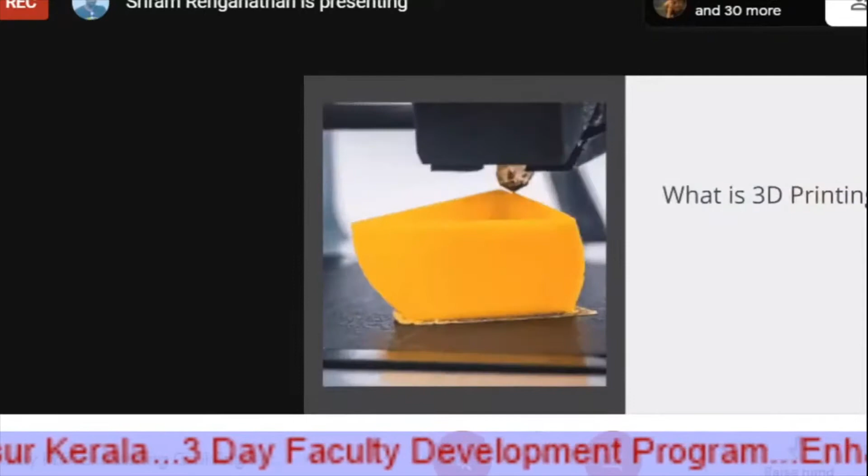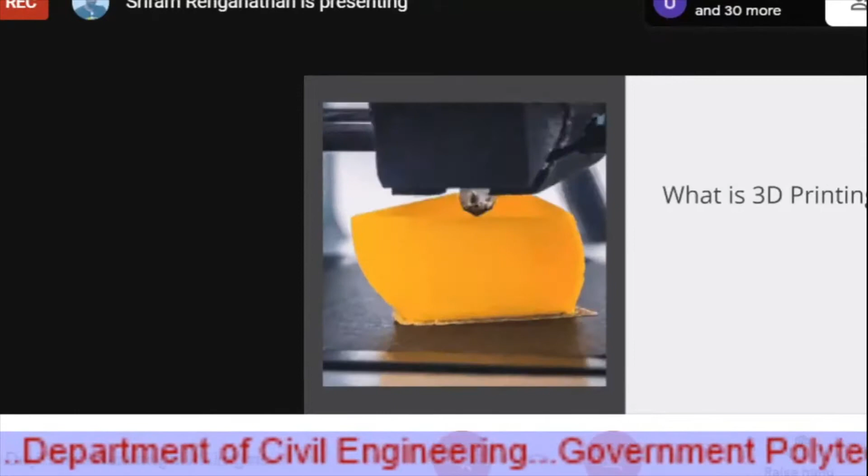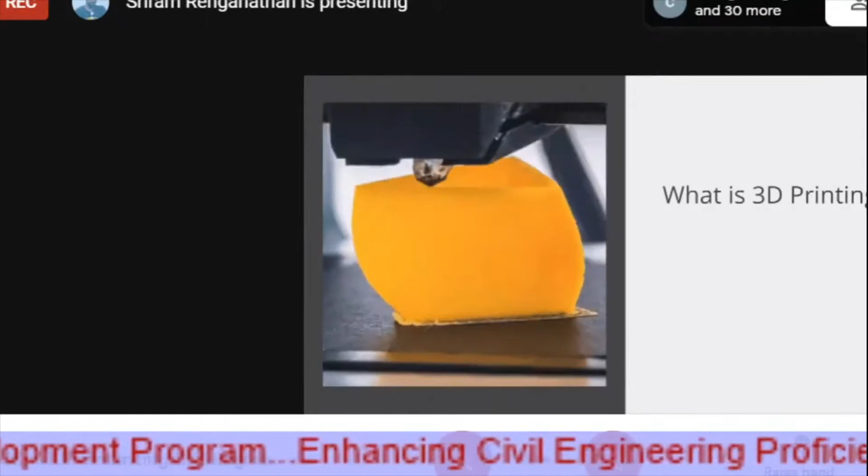As you know, 3D printing has been a much hyped technology in the past 15 to 20 years. It initially started out as a prototyping technology wherein you can make prototypes using 3D printing in plastics - you call it FDM machines. But nowadays the technology has pushed forward, and there are 7 different 3D printing technologies. When we say 3D printing, it's not just a single technology - that is a slight misunderstanding. There are different technologies in 3D printing, while FDM is one of them.

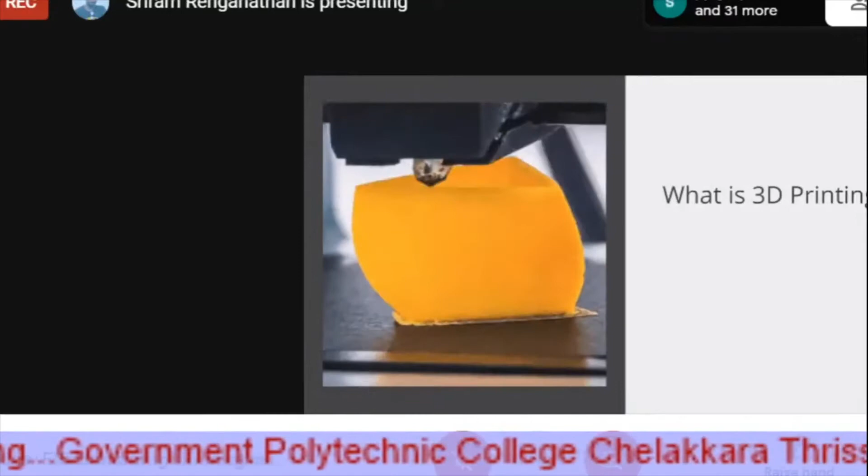3D printing is nothing but layer by layer deposition of material in order to produce a physical object. Once you give the CAD file, the slicer converts the CAD file to G codes, and the G codes translate the machine movements. Once the material is given, it starts manufacturing the object. That is how 3D printing works.

A critical aspect of any 3D printing technology is first the machine - you need to have the machine in place. Relating this to concrete 3D printing, there are two types of machines: one is gantry based and another is robotic arm based. Robotic arm has 7 to 8 axes of rotation or movement, whereas the gantry has 3 axes - X, Y, and Z.

Tvasta has built a gantry system which can be used to 3D print concrete. Even in the gantry there are two modes: one is offsite 3D printer, and second is onsite 3D printer. An offsite 3D printer means you have the machine in the factory, you 3D print the modules there, ship them to the site, and assemble it on site. This is one model. The second is an on-site 3D printer, where you take the machine and transport it itself to the site, and then 3D print the building there.

Tvasta's first 3D printed house was built using off-site 3D printing, but we are also working on an on-site 3D printing machine currently. That is one thing. And material - if you look at it normally, the traditional construction method has been done by brick and then having mortar around it and then building using it.

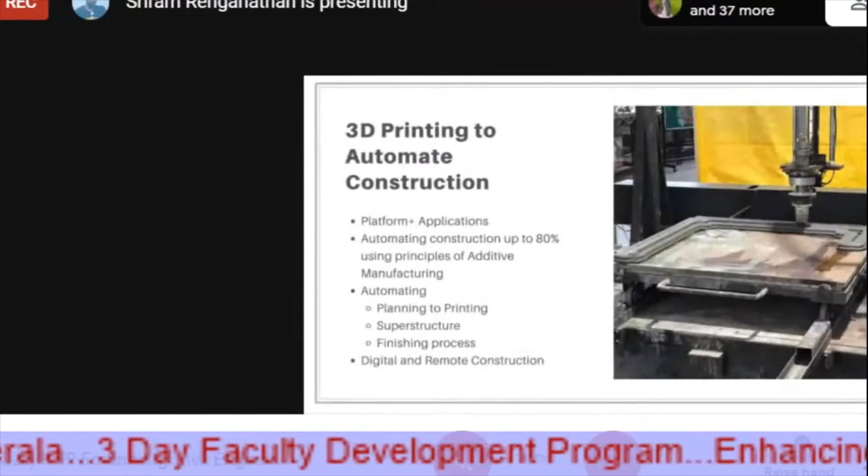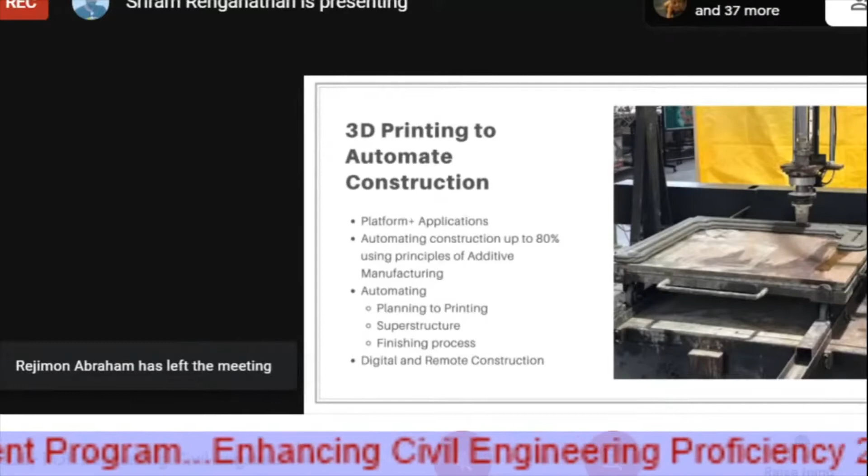What is our idea with respect to building this technology? We want to automate the construction process. Mostly, the construction process takes 6 to 8 months of time, mainly because of labor dependency - we need to equip our labor from unskilled to semi-skilled. We have a lot of quality issues because we need a lot of skilled labor, and it takes a lot of time. So we have a lot of labor dependency here.

You could have seen in this COVID situation, laborers from different parts of the country are required to carry out construction, and in their absence, the complete projects stall - it will not move. So our idea is that we need to automate the process, which will reduce labor dependency. Importantly, we are not eliminating the labor, we are just making them go from unskilled to semi-skilled. For instance, in an area where 200 laborers are required, we reduce it to around 20, and they work efficiently such that in the time of one 6 to 8 month project, they can work on 5 to 6 projects.

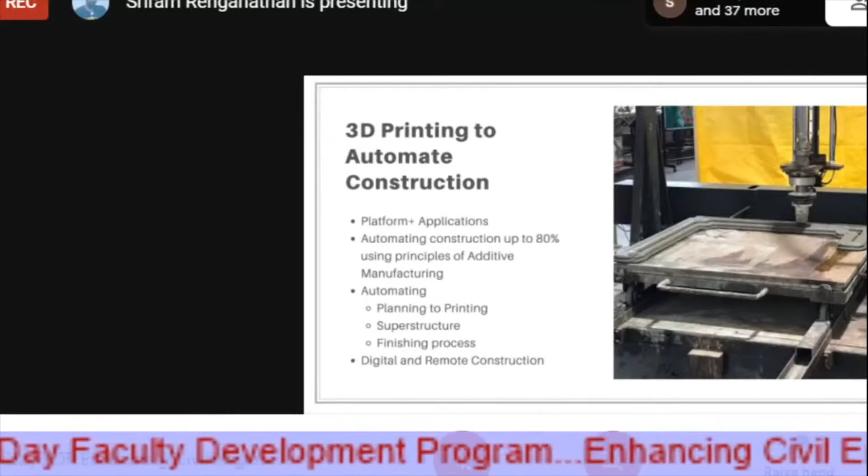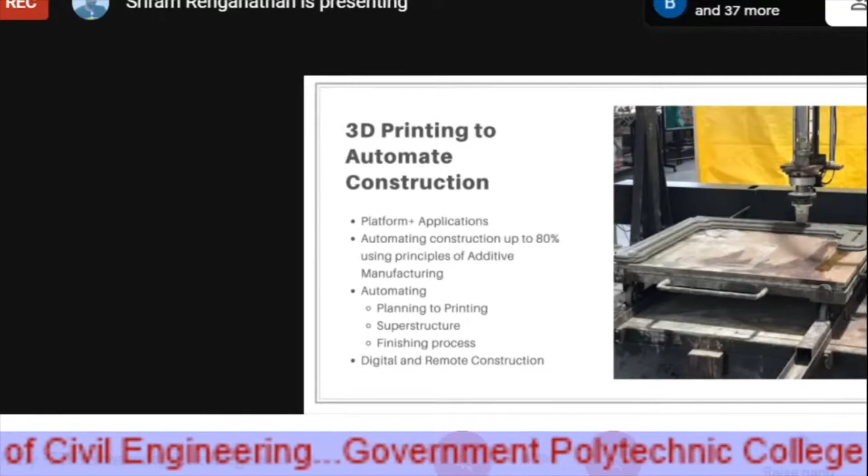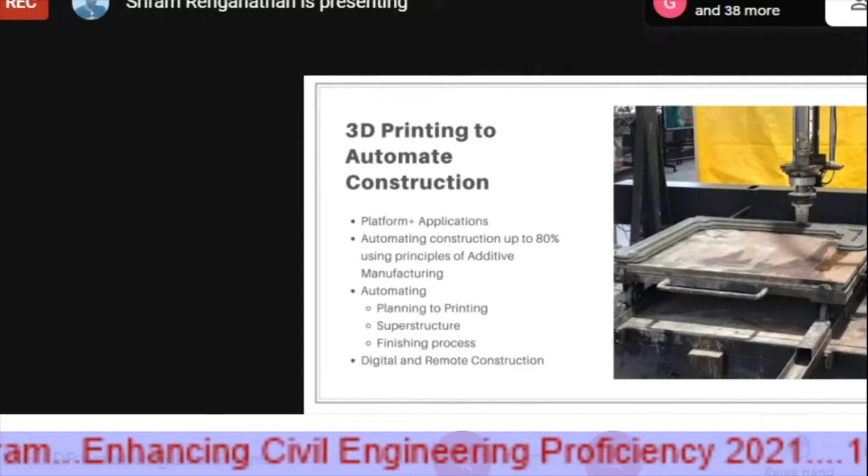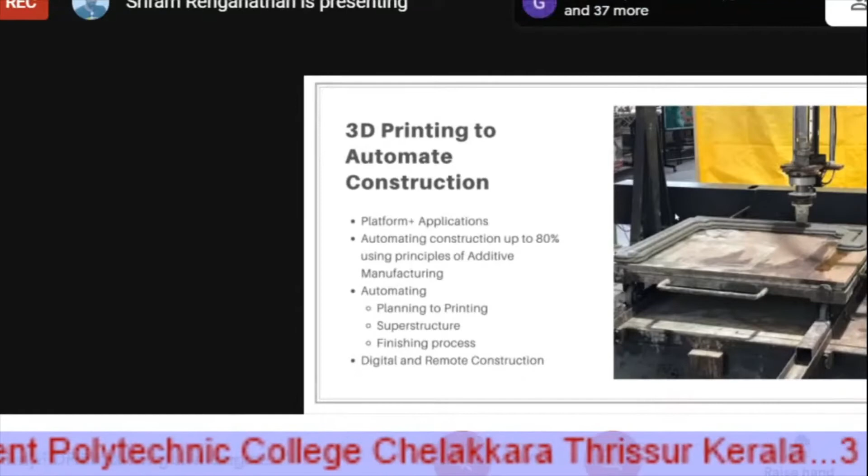Literally, our house took 3 weeks to 3D print and assemble. Look at that time limit - you can get your houses in less than 3 weeks. In a way, we push the productivity - we can build more houses in a particular time, and that is what our technology is about. We want customers to buy their houses in the same way they've been purchasing cars and bikes - you book it, give an advance, and in a matter of 1 month you get your car. We want house purchase also to be done in such a way. That is the main aim behind building this technology.

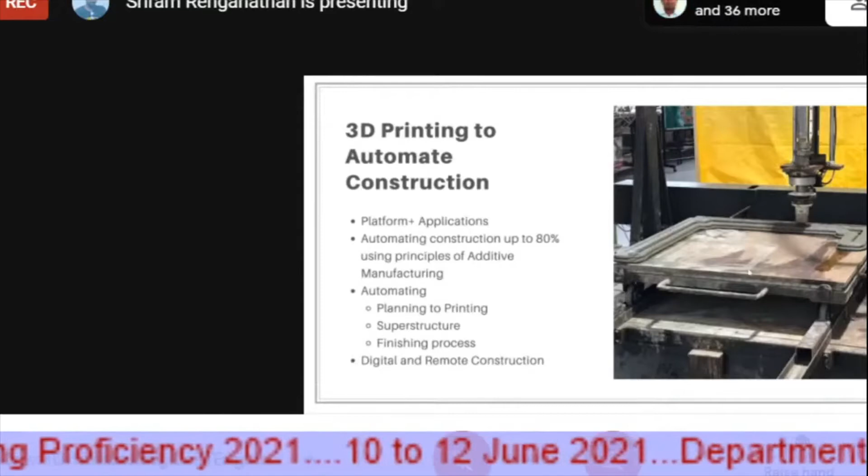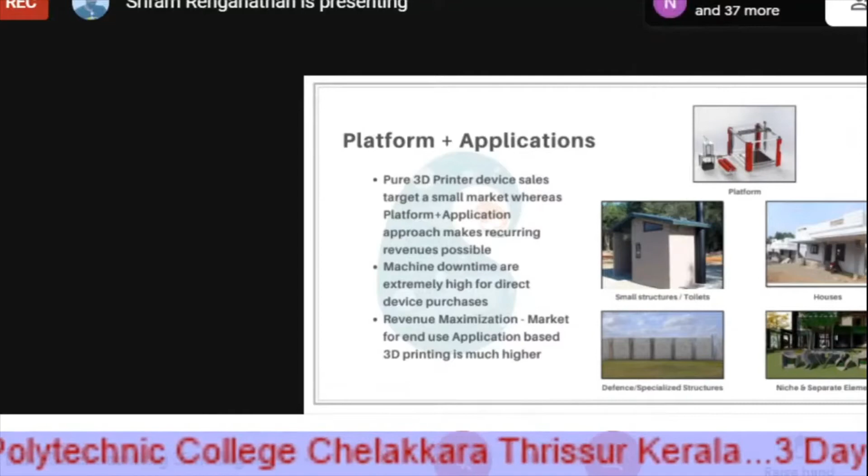So different applications of it. One is toilets, like Swachh Bharat Abhiyan. It requires a lot of toilets and emphasizes the hygiene of the environment. So it can be easily made using 3D printing. The advantage of 3D printing is that you can customize it accordingly. Generally a matchbox or straight structure is done; instead we can go for curved walls. We can explore more designs that can be done.

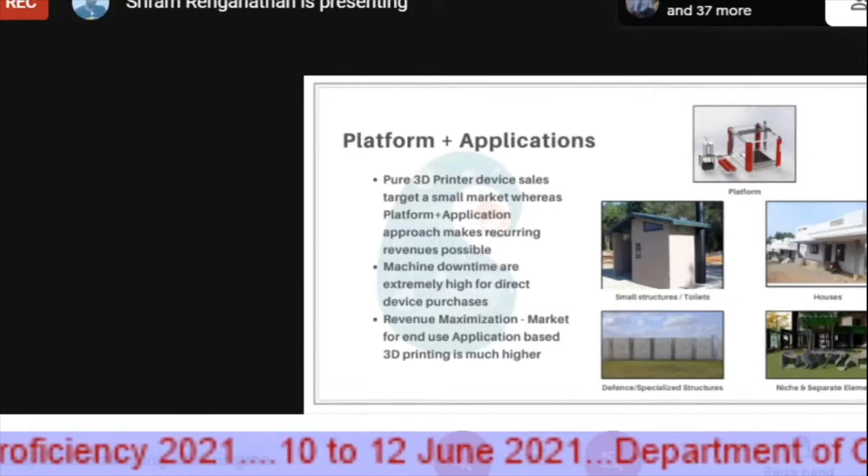And then houses, of course we are targeting affordable houses for all in the long term. We are working with the Ministry of Housing and Urban Affairs. We are also looking at different segments of housing: premium segment, affordable segment, and then infrastructure projects, several things, and then niche and separate elements.

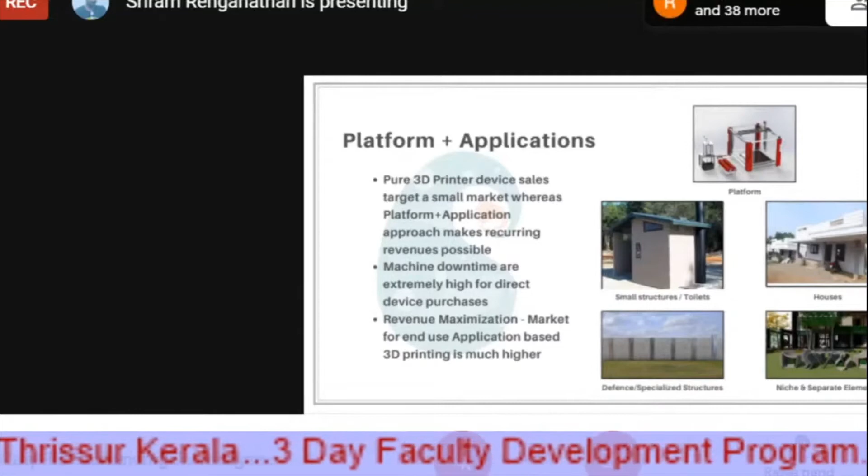We are also offering 3D printed concrete chairs, 3D printed concrete furniture, and architectural elements. So using this technology we are working with different applications.

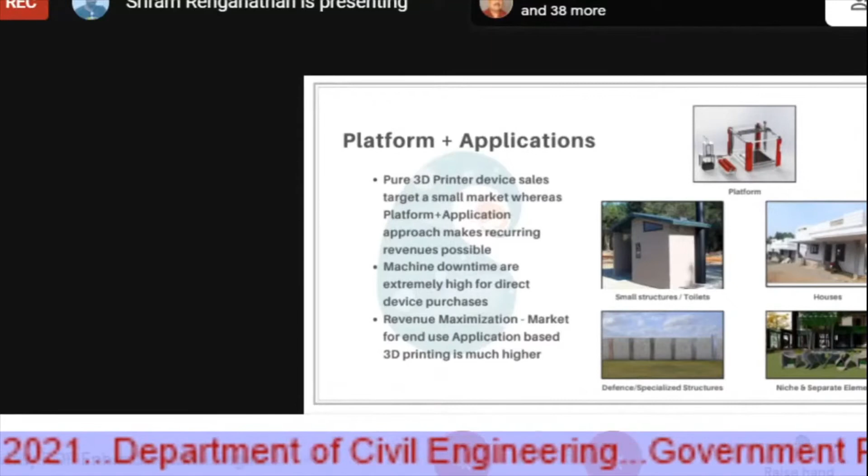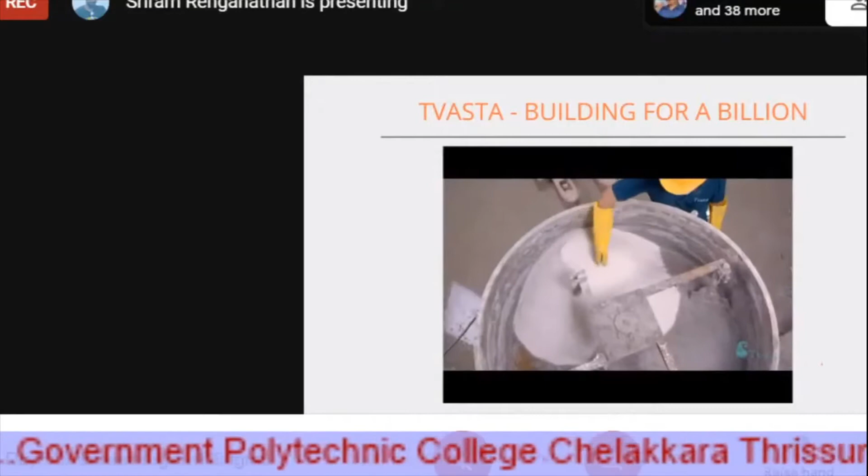So this is how the entire house was made. You first prepare the mix and then pump it to the 3D printer, and then start printing layer by layer. The software controls the entire process.

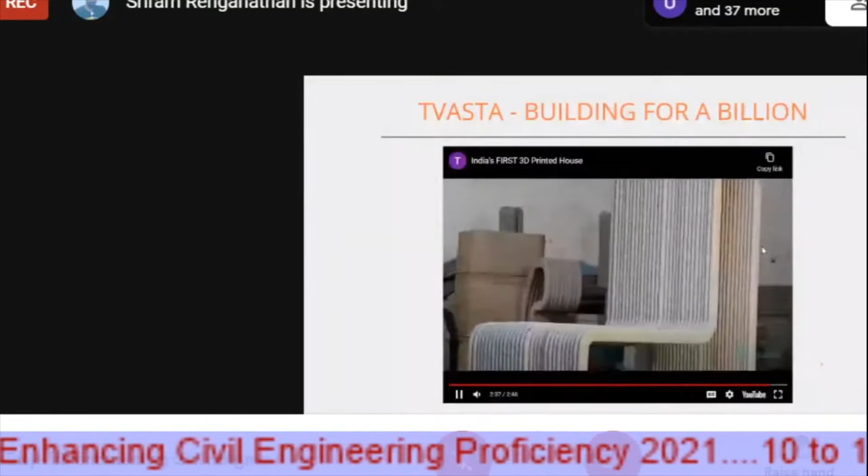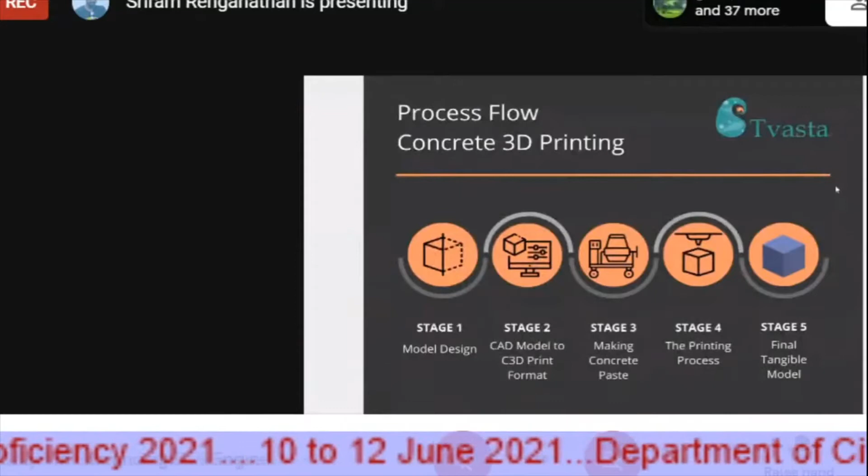I will explain the different stages in concrete printing. First is the model design, and once you design it, you input it to the software, which will slice it into G-codes. Parallelly you make the concrete mix, and once the mix is prepared, it is pumped into the 3D printer, and finally the model is printed. That is the process flow.

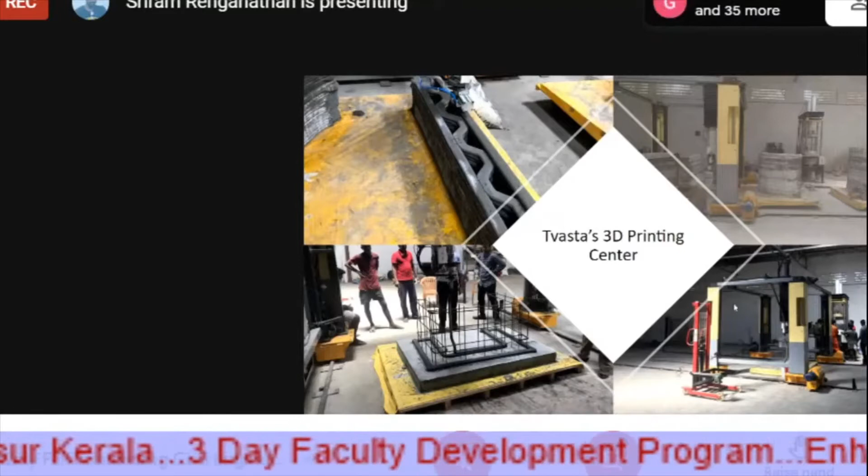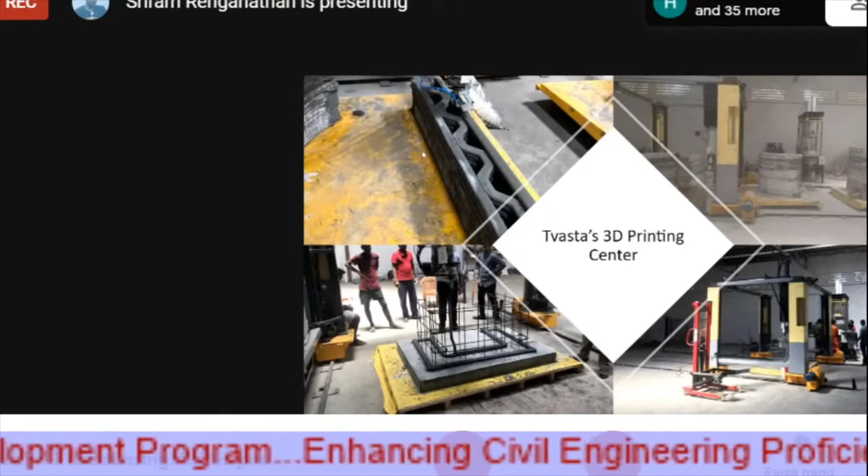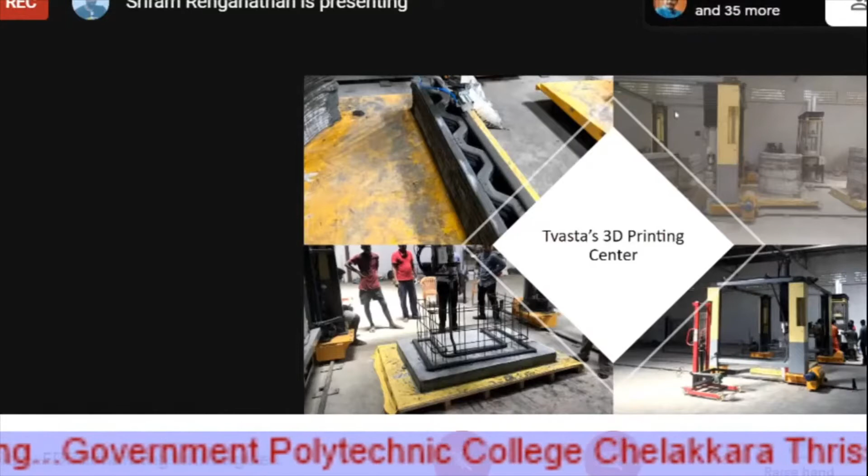I would also like to take this opportunity to tell any research institutions who are interested: we also have a product offering, an R&D 3D printer, in dimensions 1 meter by 1 meter by 0.5 meters. We have sold 4 machines overall to government colleges and other institutions who have a major advantage on the civil side and want to push the boundaries. We will build a machine similar to this so research institutions can do their research in concrete printing, and we support them so the college or university gets more research papers. I'll be more than glad if any staff or research interest aligns with concrete printing or 3D printing, and I'll be happy to help out.

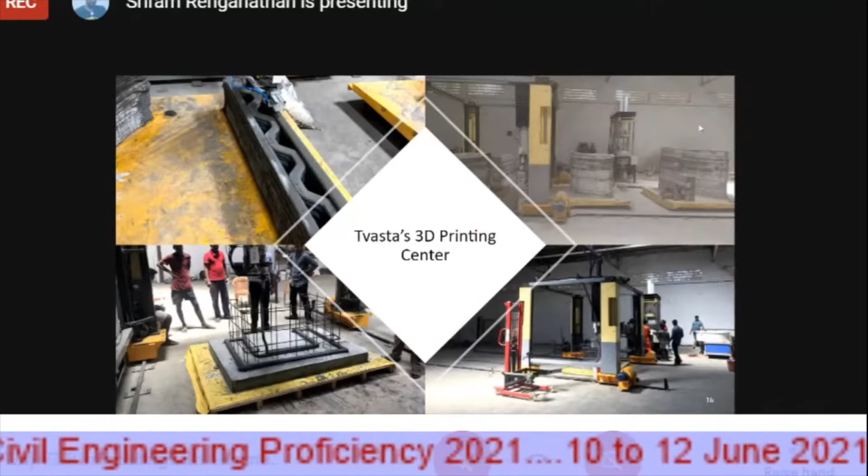So coming back to the presentation, this is the factory. What we do is integrate the steel reinforcements while printing or after printing, which gives a structural application.

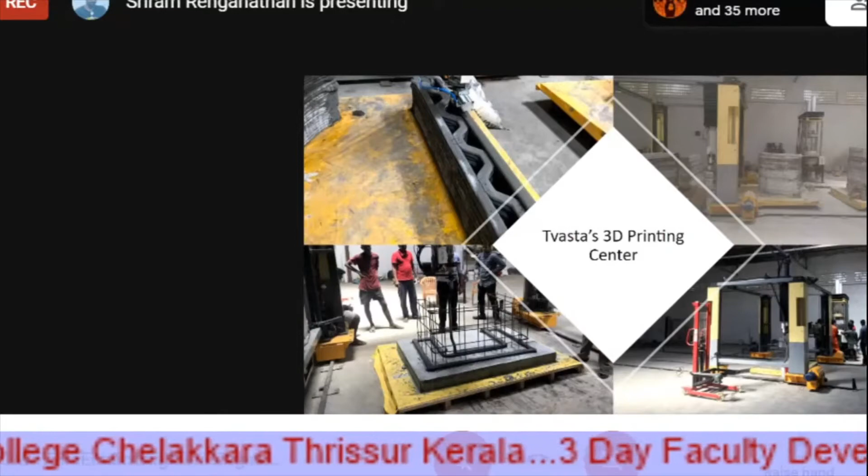So what we have also done is 3D printed a roof, and we have experimented. This is how it will look like.

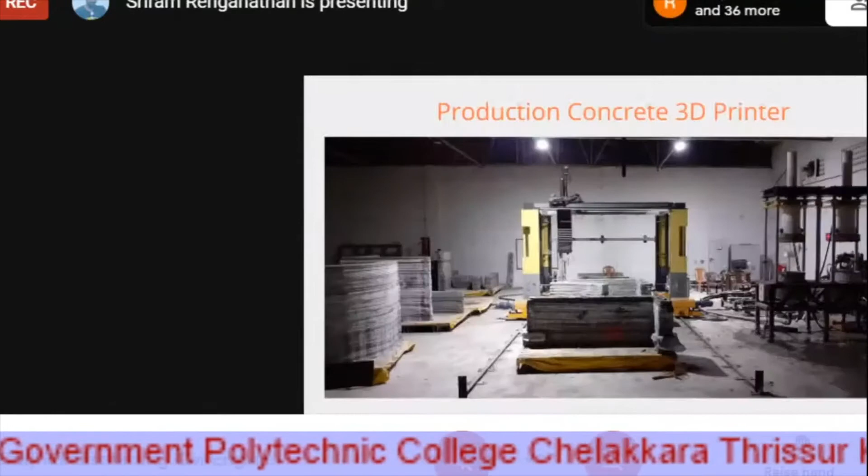And this is our production concrete printer. We 3D print several modules and then cure them. Once cured, we take them to the site and assemble it.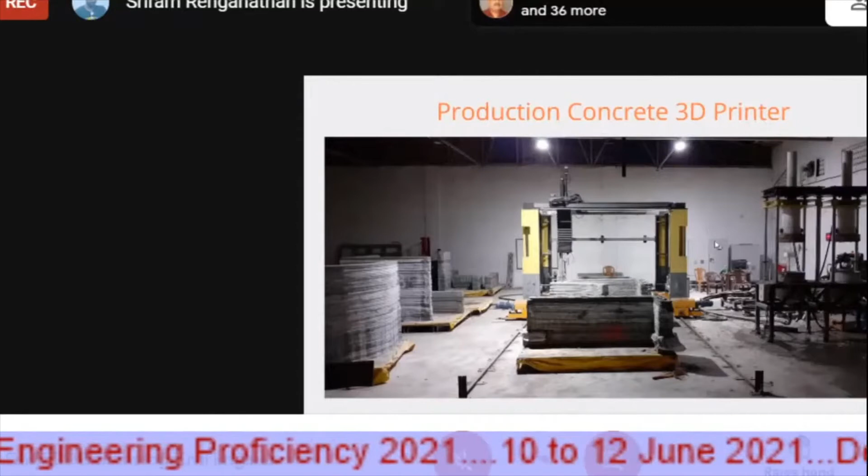So this is just the plan of the 3D printed house that we did. I think it's pretty straightforward.

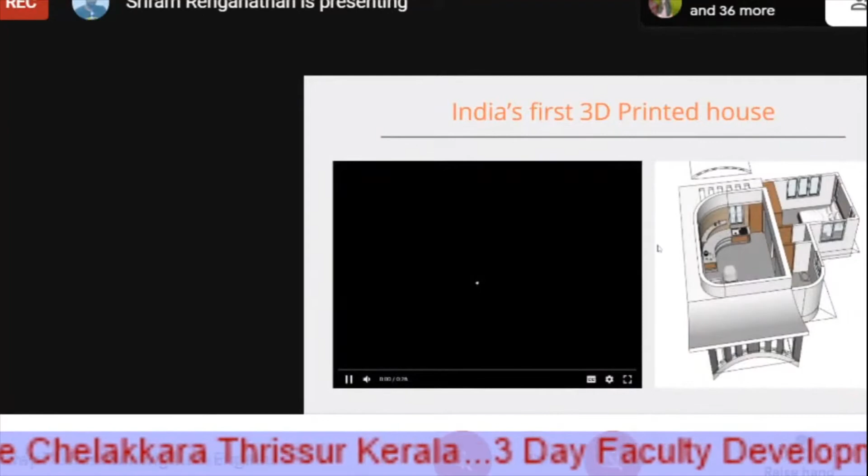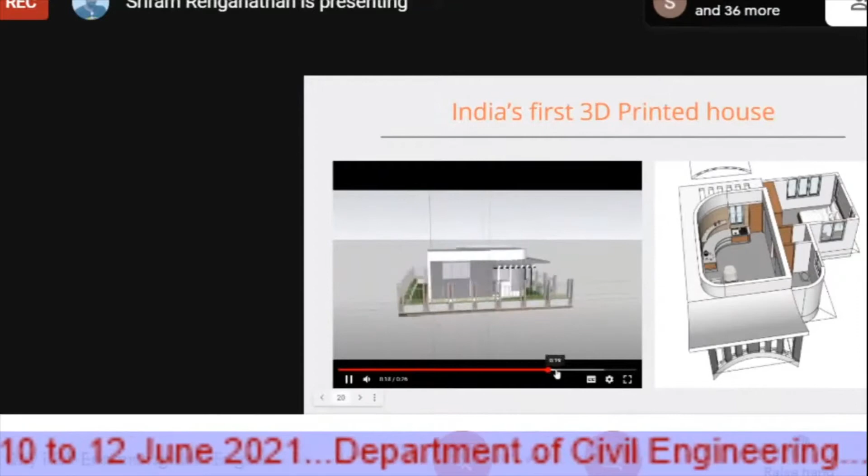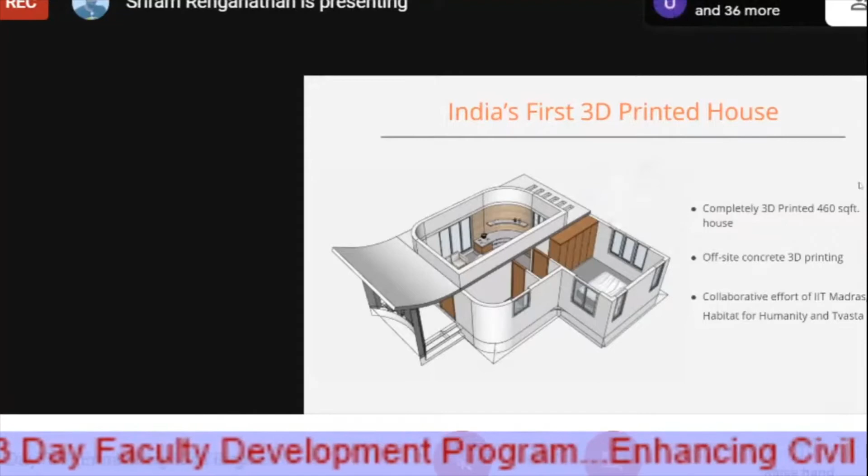So pretty straightforward details: it is a 460 square foot house. It was done using offsite 3D printing, mostly by IIT Madras, Habitat for Humanity, and Tvasta together.

I will walk you through some architectural and structural elements that we did apart from the housing project.

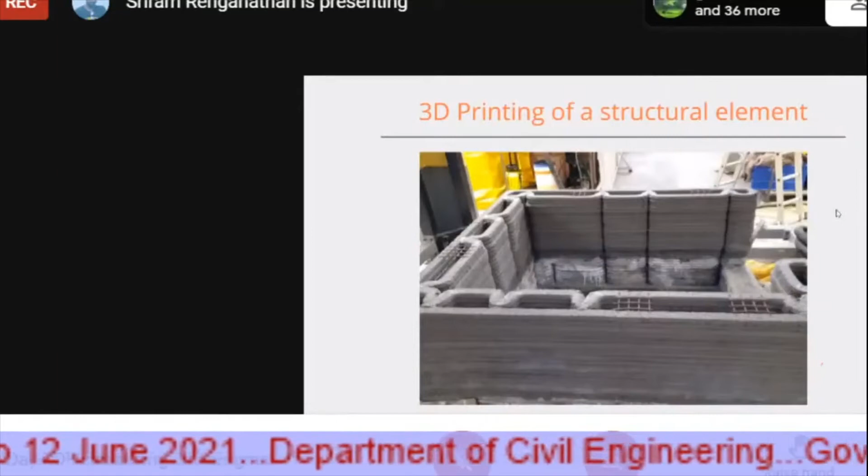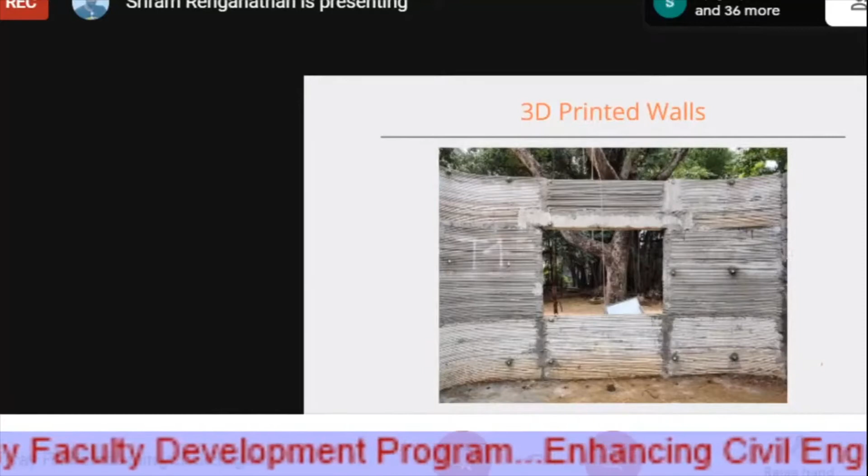As I touched upon earlier, what India needs is an affordable, sustainable, and speedy solution. I think time is a very important factor. If a house takes 6 to 8 months, there is a lot of capital that goes into it. So a 10 times reduction in lead time is a great value addition to the people.

And sustainable, of course. Dr. Anita Jacob ma'am mentioned about sustainable materials and mixes that can be used in construction. That is also a very good upcoming research area. We are putting a lot of effort into how to make sustainable material mixes in 3D printing.

And affordable, of course. 3D printing definitely has a very good chance to compete with other technologies, because it eliminates material waste and labor dependency to a great extent, and it also offers a speedy solution. So we will be able to reduce a lot of cost with respect to construction.

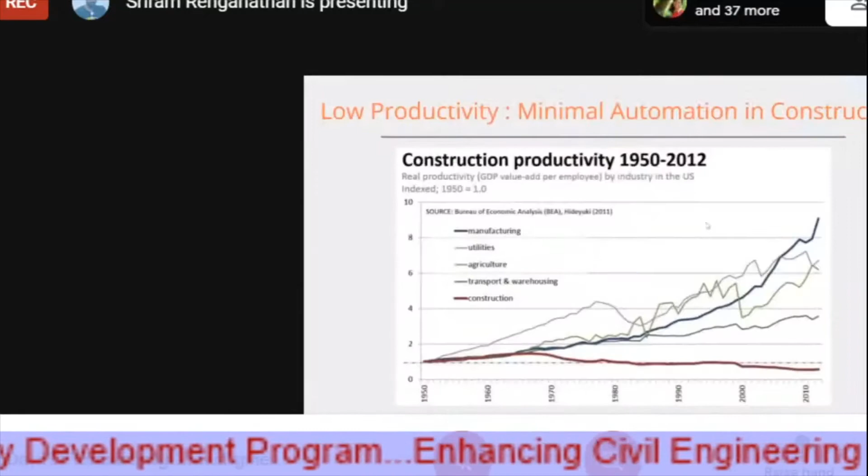So what I'm saying is proof that the construction industry has not adopted automation for the past 60 years compared to other industries.

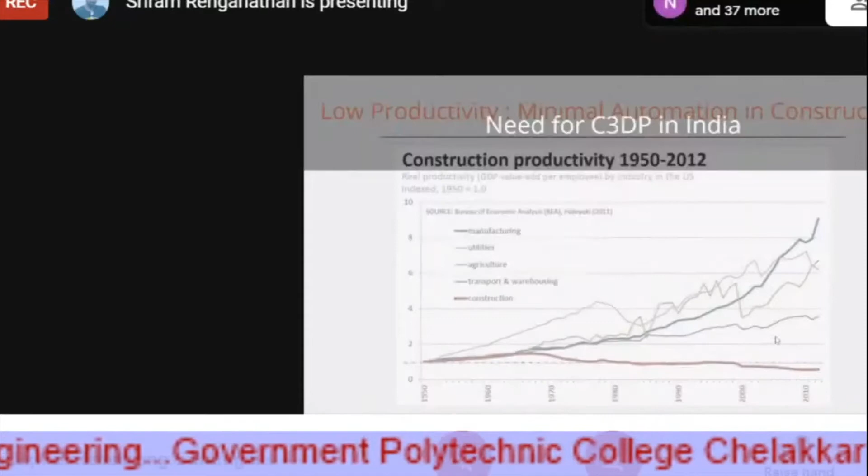Why India needs a solution like concrete 3D printing is that currently we are running a house shortage of 49 million houses. We have promised to build 100 million houses by 2030, but with our current existing technology, we will not even be able to deliver 20% of it.

With technologies like 3D printing, precast, and traditional construction coming together and executing, only then will we be able to meet at least 60 to 70% of the demand.

And wastage, as I told you, we incur a lot of wastage, which in turn emits greenhouse gases, and brings in a lot of negative impacts.

With productivity rates being dependent on labor, that is one key area where we need automation. Productivity will increase 10x once we bring in concrete 3D printing. And also affordability - once we start making affordable houses, it will be a great solution for the people of India.

So the advantage of concrete printing - I would like to put it clearly. One thing is that 3D printing as a construction technology can bring in customization. You can bring in any designs; you don't have restrictions over the designs. So that is one thing.

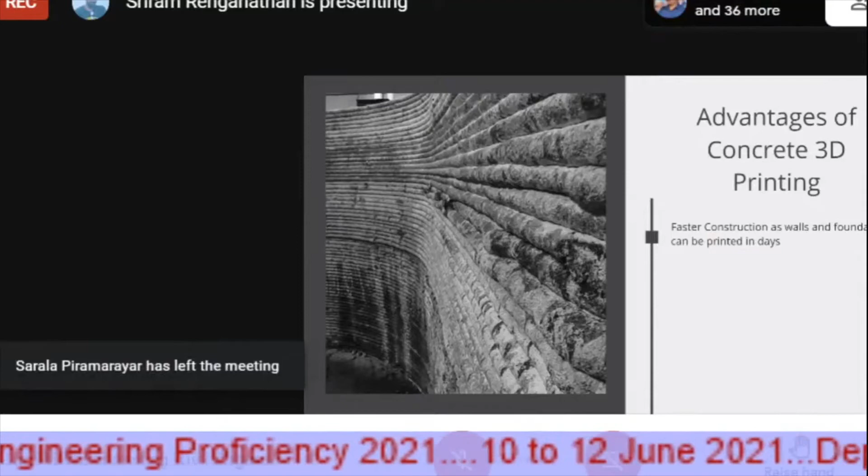And then speed is another value addition. The third is that you can explore hollow walls, which is not possible using any other construction technology, and you can integrate electrical, plumbing, and mechanical wiring lines directly using 3D printing. And last, sustainability - you can use different material mixes, customize the mixes, and make it more sustainable. These are a few advantages of concrete printing.

Tvasta has probably the expertise in machining, materials, software, and civil engineering. We are doing extensive testing with some government institutions, and we are also incubated by the Ministry of Housing and Urban Affairs, an accelerator to work on concrete 3D printing.

As I mentioned, we are in partnership with a lot of Tier 1 institutions, and we have sold 4 to 5 R&D printers to government institutions, and in turn help them do their research in concrete printing. Apart from that, we are also working closely with architects, builders, and cement manufacturers.